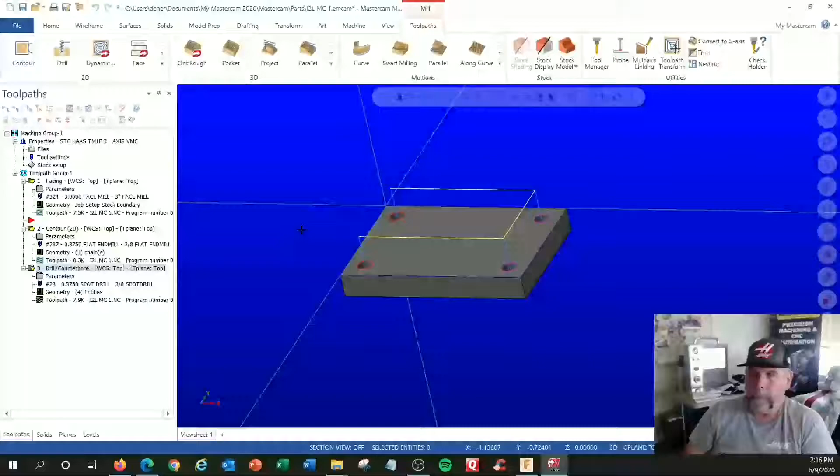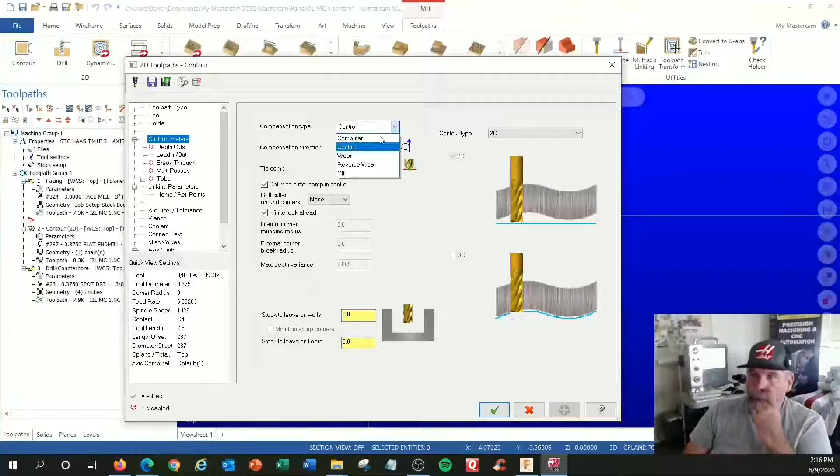So we need a, personally, I select up in the upper right corner, so it's not that important. So if this is our X0, Y0 right here, then I would call this like real simple, like X minus 1.0 and Y positive 1.0. In this case, let's see, let's pull our print up here. All right, here's our print, right? 3 inches. So if I went to do just like what is on the screen there, I would go to X 1.5 and somewhere up here like Y 1.0.

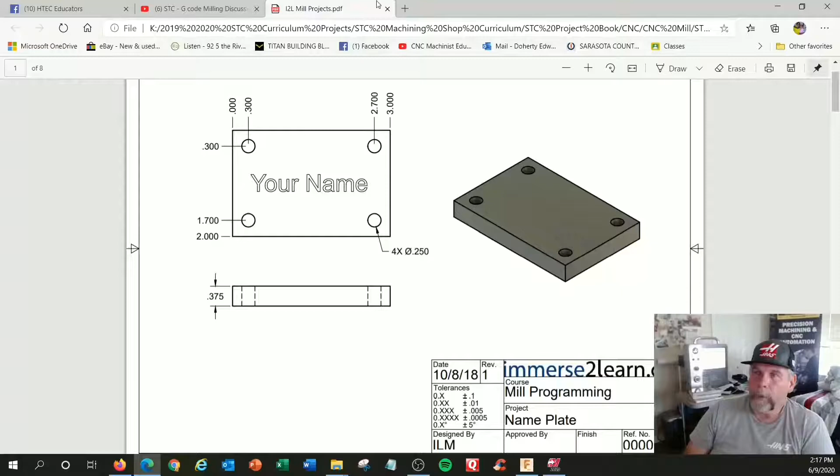And then I would go to this Y0 coordinate and turn on my cutter comp and go to these positions. Boom, boom, boom, boom, and then cross the finish line and go around the corner. And then if I'm doing it around here, I call it crossing the finish line. But over here, we'll just go over here, and then we'll start up here. Actually, I think I'm going to reprogram this so it does it the way I want it to.

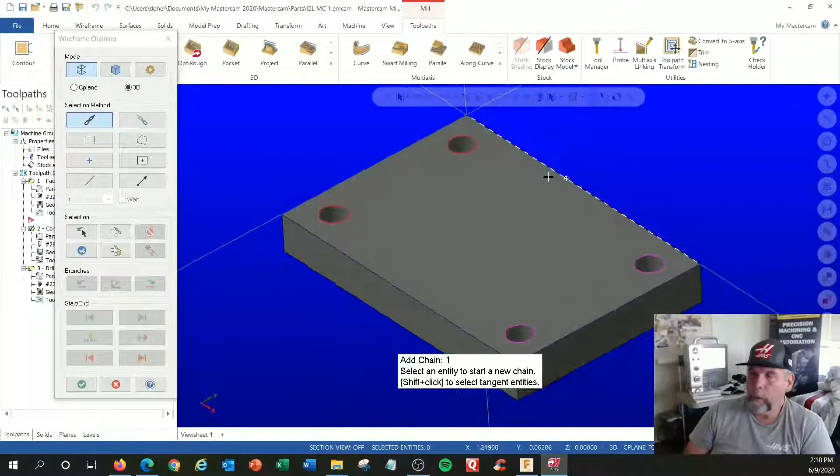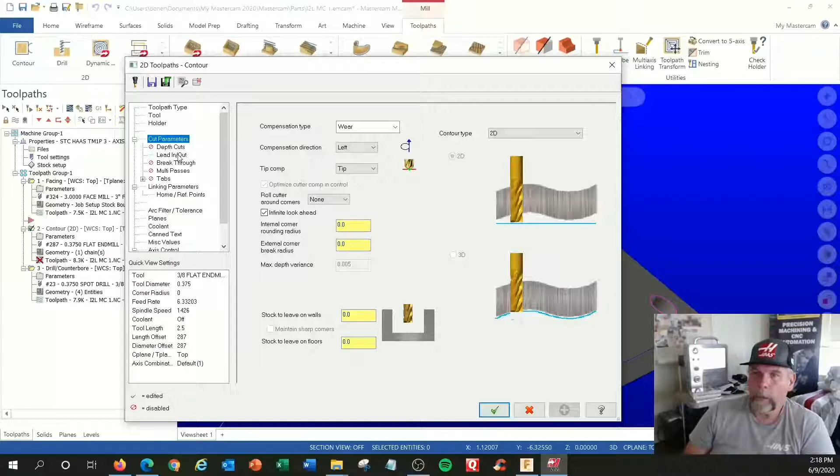So geometry, selection. I'm going to rechain. And I'm going to select, where is it now? Oh, crap. It's metric. All right. Yeah, it's going to be this profile here. And I need to start at the beginning. Where the heck is that selection? Lead in and out, I think. Midpoint. We don't do midpoint. I'm going to go start over here. I'm going to regenerate. I hit top view. All right, there. That's how I usually manually program these things.

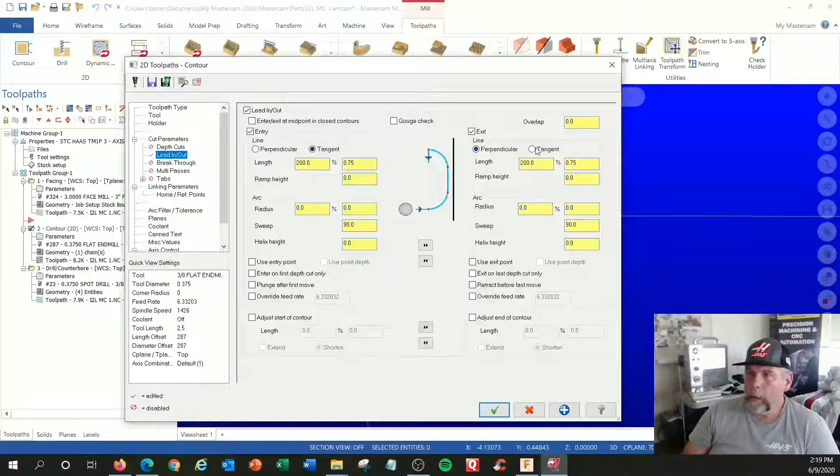And I'm going to add in a, let's see. Length 200. I'm going to do a 90-degree angle. So I'm going to make this, how do we do that now? Tangent. Not perpendicular. It should be perpendicular. And, nope, that didn't do it.

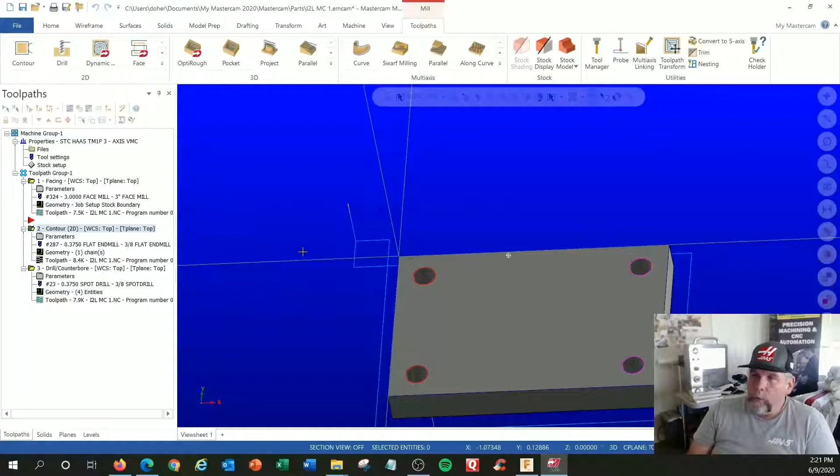Okay, I'm back. I fixed it the way I wanted to. I'm going to start in the upper right corner here. Okay, so this will be my start point, and the yellow lines actually represent the rapid moves. And I'm going to feed down to the bottom of .375 and go a little bit more and walk around this. So I'm going to hit top and let's replay this again. Hit verify and play. Oh, there we go.

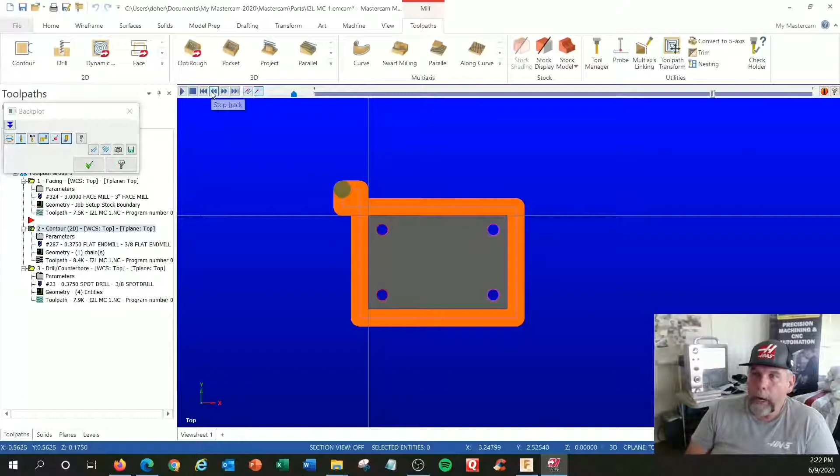Goes around, and across the finish line and shut the compensation off. So let me backtrack this. Step back. Okay, let me zoom up a little bit here. All right, so let's call this X minus 1 and Y positive 1. That's our start position. If you follow Mark's first 9 lines, you've got to put the position in there. Then we're going to go step by step. I'm going to do a little angle here.

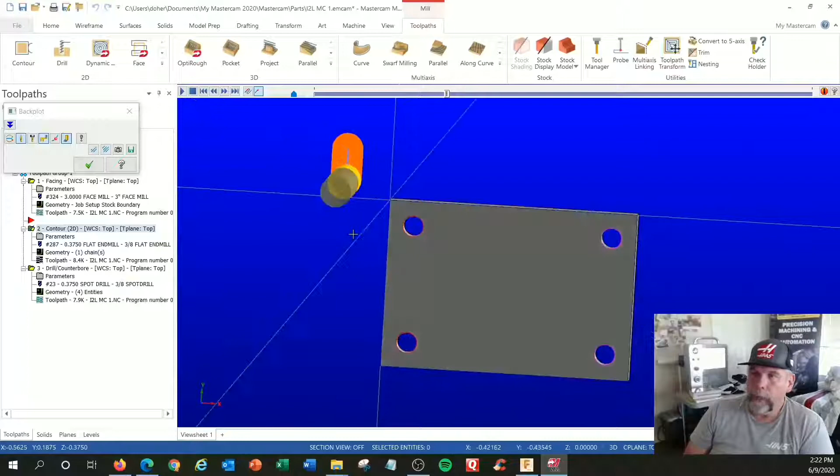All right, comes down, and now we're at cutting depth. That's going to be a G1 move to go down. This one here is the move you need to turn on cutter compensation. So as you're approaching Y0, which is here, you're going to say, in this case, this is tool 2, turn on the cutter compensation value that I have in the tool offset page. But I'm using Y0 as the coordinate.

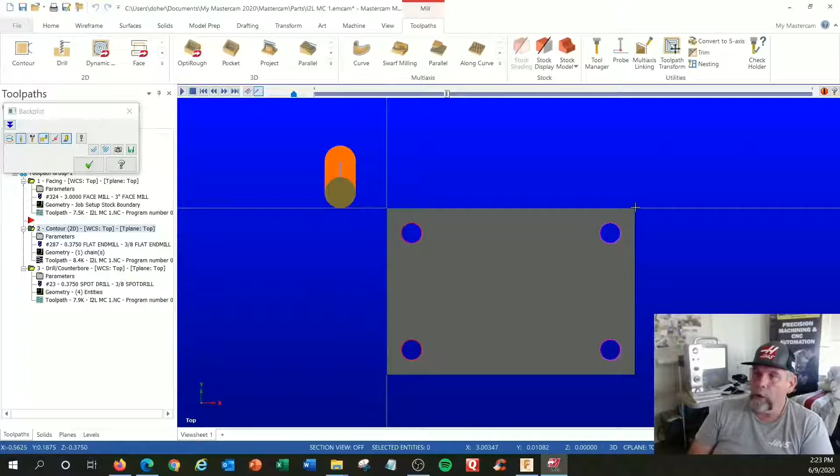If I did not do that, this tool would be right over the middle of this, and this would be way too small. Let's go to the next step. Then I'm going to say, go to this corner coordinate, which is X3 and Y0.

Right there. But in reality, it's at X. I wish I put a half-inch end mill here. I could probably change it. It's 3 inches plus .1875, 3.187. That's where it actually ends up, because it's taking this coordinate and adding it to it.

And as we're going in here, we're using G41, and we always use G41 because we always want to climb mill. Left is the climb milling side. We rarely use G42. It's going to compensate. Even when you're coming in this way, it's looking ahead. It's looking ahead. It's like a Swami.

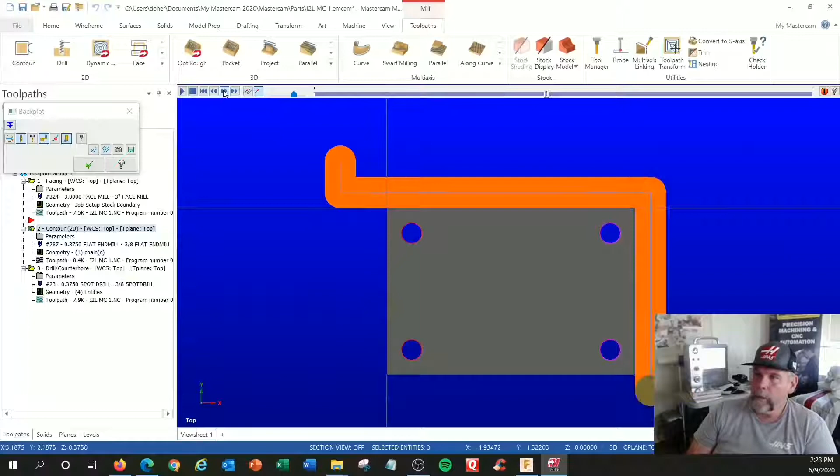So, okay. And I'm going to go down here, and up here, and cross the finish line. We made a nice rectangle. And then we have to shut the compensation off. And that's this last move. And I just go back to the same position. It's pretty basic. Okay.

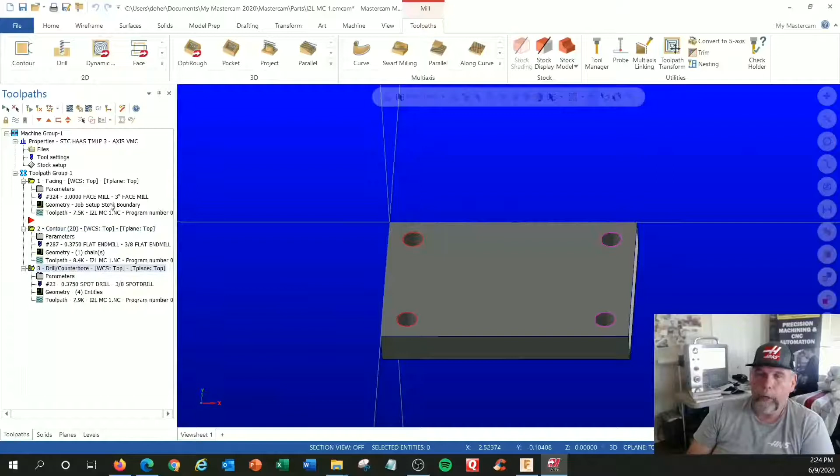And then the drill cycle. I'm going to turn off this tool path and turn on this one. All right. Let's go back to simulation, backplot. And this is a 90-degree tool. Typical spotting drill for your soft metals. All right, how deep do we go?

You know, if you have the little Haas mini book that they give you, there's actually a page in there that you can do quick calculations of like 82 degrees or 90 degrees or 118 degrees. That's for your normal drills. But a 90-degree tool is a pretty typical spotting drill, they call it.

And a lot of us like to get the spotting drill to spot and leave us a little chamfer, so we don't have to come back with a chamfering tool. But you're prepping to run the big drill through it. So how deep do you go? 90 degree is actually pretty simple. It's if this hole was 250 diameter, according to the print, right? I don't know what size they are on there, but I think I looked it up. It was 250.

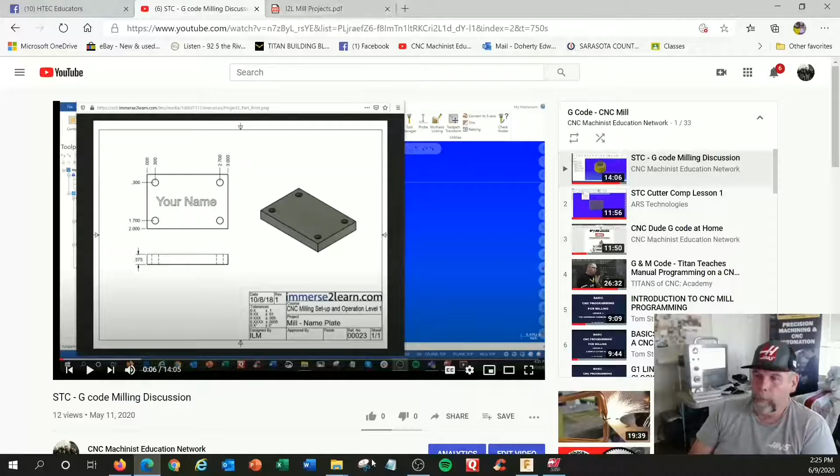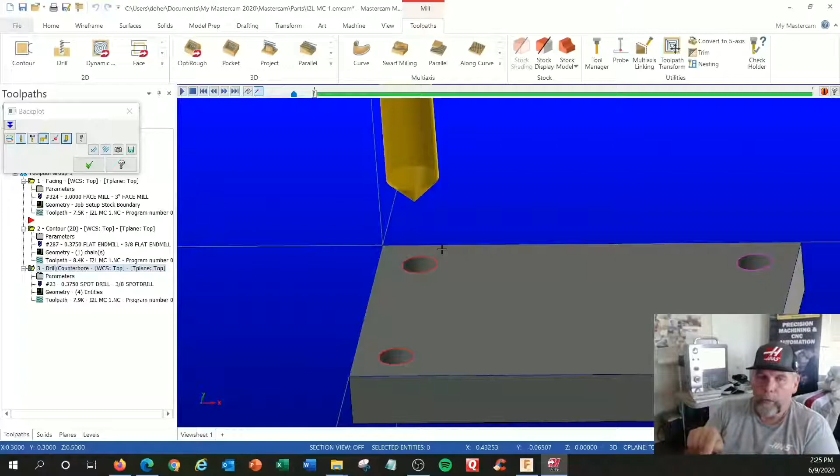Then it's actually not even the, it's the Pythagorean theorem, but it's half as deep as it is wide. That's going to be your Z. And if you're calling the top Z0, to make this 250 wide, you would go 125 deep. That would be your Z. All right, hit play. Let me leave the verify on. Oh, I guess it doesn't do it now. One step at a time.

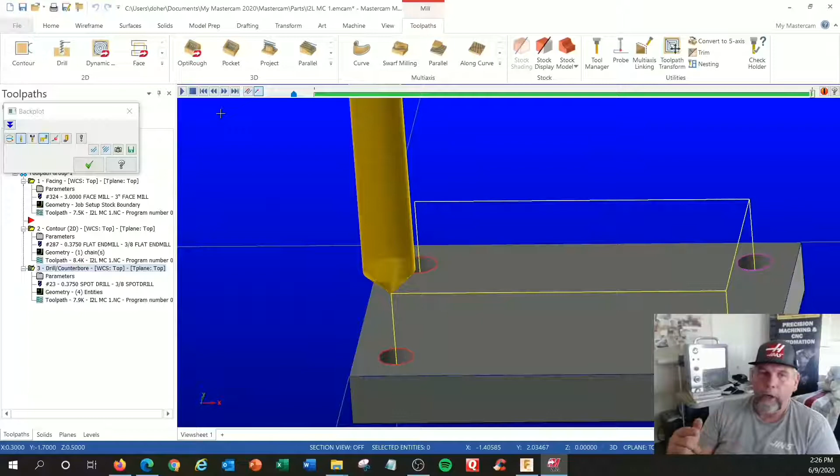So this would be your canned cycle, we call it. In the background, it's running G1s and G0s, and you can literally program it longhand. I think back in the late 70s, they were doing it like that before they came up with the canned cycle, if you want a history lesson. So it would rapidly go to position, and if it's up here, you might rapidly go to just above it, which is an R level. And then you feed to the depth you want, and then you've got to decide where you're going to return to. That's the G98, G99.

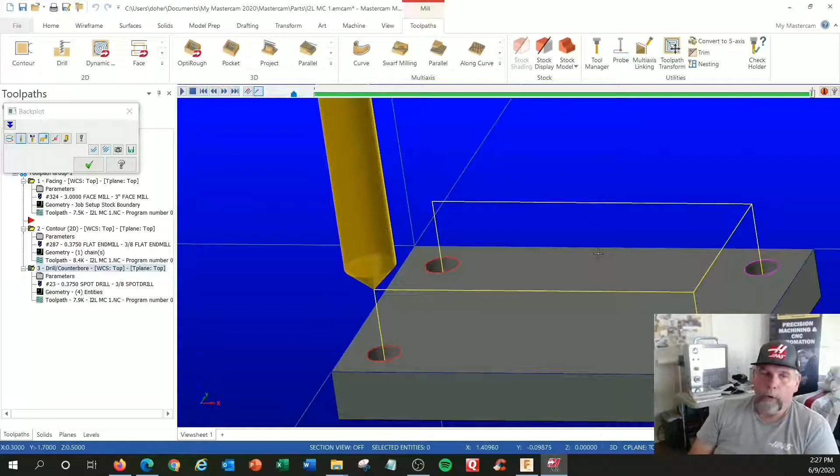And if you watch the video with the carbide end mill that breaks, a drill that breaks, if you need to return high, that would be the initial position, and that would be G98. If you say G99, it's going to return to the R position if they're different. So normally, especially if you want to jump over clamps, G98 is always the safer selection.